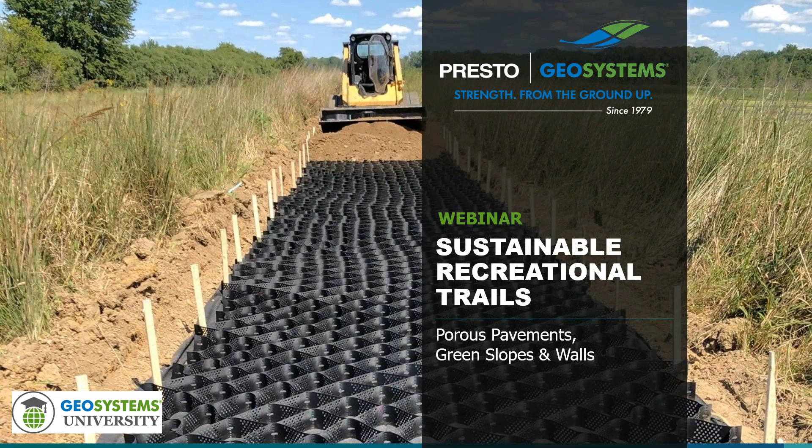The focus of this presentation is on ways to build recreational trails for walking, horse riding, and light vehicle use, as well as different methods for stabilizing embankments near trails.

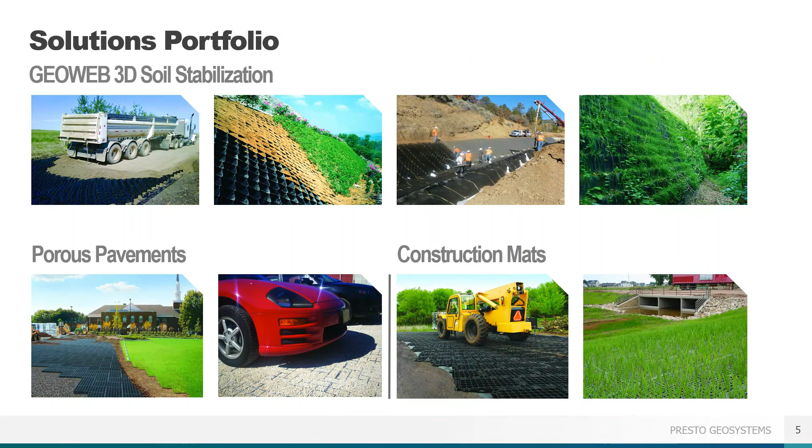Presto operates in 3 product areas: soil stabilization using our GEOWEB Geocells, which can be used for load support, slope and channel protection, and constructing green retaining walls; porous pavements, of which we have both vegetated and aggregate solutions; and lightweight reusable construction mats. Today, we will cover some GEOWEB solutions, as well as our aggregate porous pavement product and a few of our construction mats.

An important thing to keep in mind as we go through this webinar: the trails made with our products are all considered permeable trails. That is, there's no impermeable paved surface being placed. The final surface is going to be a stone or sand material. This lessens the environmental impact of the trail, reduces the amount of heavy equipment required for installation, often in difficult to reach locations, and improves the overall cost and speed of the project.

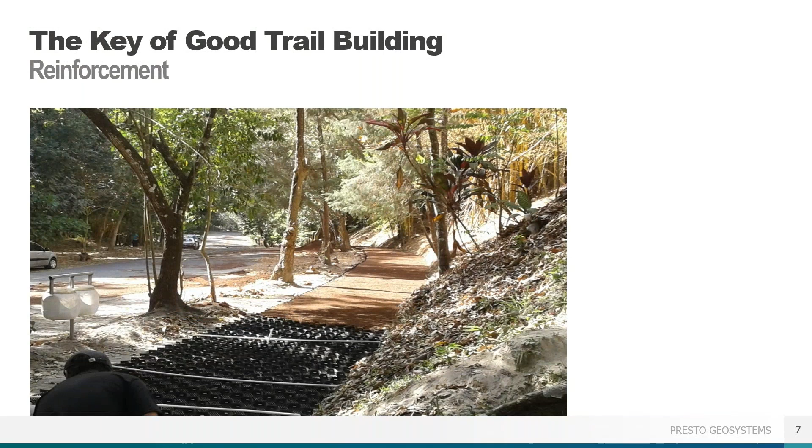We'll begin with what makes a good trail. The first aspect of the design is the reinforcement of the trail area. Especially when the trail moves through sensitive areas, keeping the path intact is how you keep people from damaging vegetation or getting lost while wandering. The trail needs to be clearly delineated and reinforced enough to stay in place over time. Using products specially designed to act as reinforcement of the soil or stone means the trail will last longer and will not encroach on the surrounding environment.

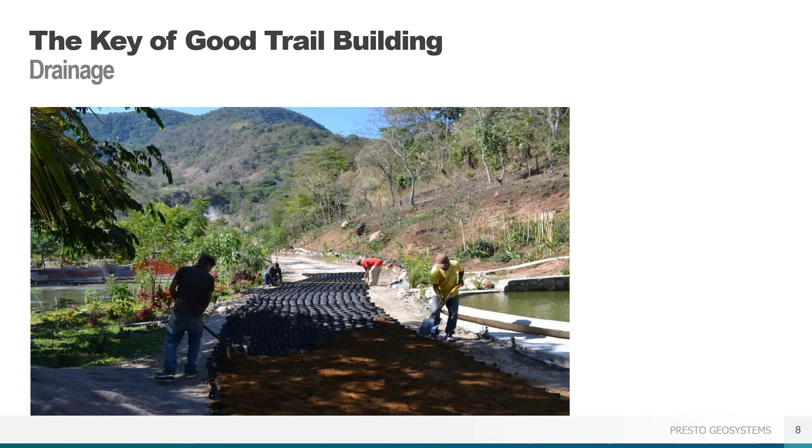The next key to a well-designed trail is drainage. Ponding water can ruin a trail surface, and water that runs off the trail into unreinforced areas can scour and damage those areas. As I mentioned, all the products from Presto are considered permeable, and it is precisely for this reason. By keeping the surface permeable, the water infiltrates at the point of contact right when it hits the trail. The water can then permeate down through the product and into the subgrade, entering the groundwater system. The water won't pond at the surface, and it won't run off or collect outside the reinforced areas. This keeps the trail in the same condition, no matter the weather, so there won't be any flaws or failures created below the surface that you can't see.

The last thing to consider when designing a trail is how to confine the surface. Loose aggregate, stone, or sand is easily moved under shoes, hooves, tires, and water, leading to ruts, holes, and generally damaged trail areas. When the trail surface is damaged, people are going to want to move around the damage, leading them off the trail and into unprotected areas, potentially disturbing sensitive environments.

Keeping the surface in place is an important feature of the products from Presto. When the stone or sand is properly held in place, ruts cannot form and the material can't be washed away. This greatly reduces the amount of maintenance required because the trail surfaces aren't degrading.

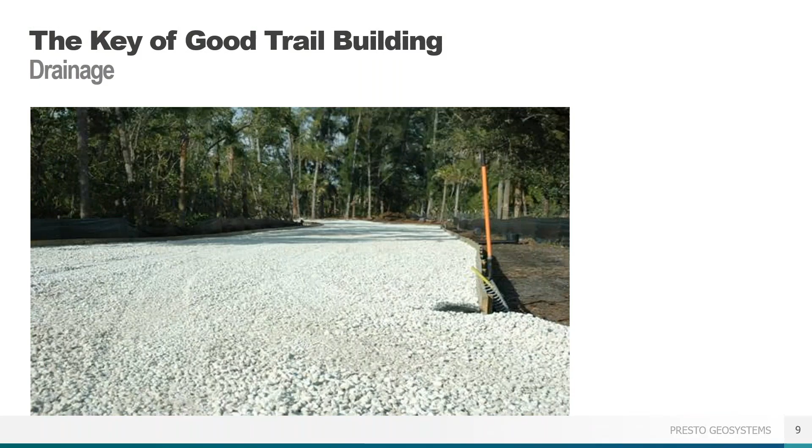The first product we'll look at is the GEOWEB 3-dimensional soil confinement system. This is a geocell, which may be a term you have heard before. It is similar to a geogrid, but is 3-dimensional, so it has depth to provide true confinement and can be used in a wider variety of applications.

The GEOWEB system consists of two main components, cell size and cell depth. The cells come in three sizes, roughly 8 inches by 10 inches, 11 inches by 12 inches, and 18 inches by 20 inches, and heights of 3, 4, 6, 8, and 12 inches. The combination of cell size and depth depend on the project details and loading requirements, but generally trails will use a 4 or 6 inch depth and a small or medium-sized cell.

Seam strength is very important to the function of a geocell. The stronger the seam strength, the better designed the geocell is. A strong seam allows for heavier infill material, steeper and taller slopes, and better lifetime performance. The strength of the panel material, in our case high-density polyethylene, is also critical to the strength and performance of a geocell system.

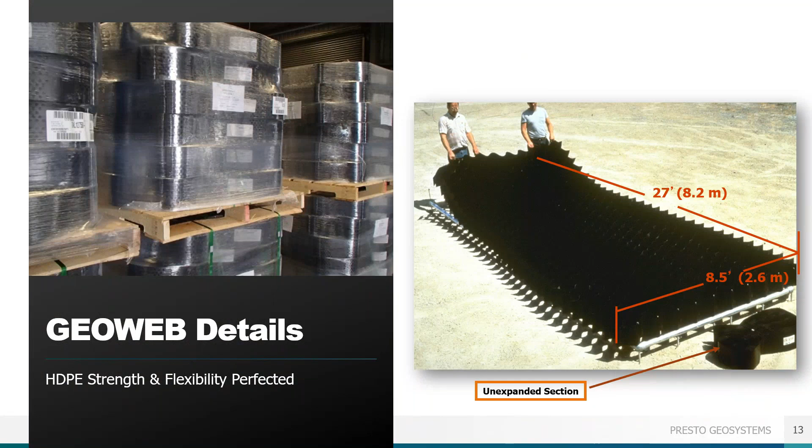Here you can see a typical GEOWEB panel. It comes tri-folded and palletized. Each section has a nominal width of 8.5 feet, with lengths varying between 12 and 58 feet. The panels are flexible, opening like an accordion, so they can follow the natural contours of the work site without being confined to a rigid set of dimensions. The panels can also be easily field cut to fit whatever project dimensions you require.

GEOWEB and our accessories are 100% made in the USA under strict quality assurance and environmental control processes, sure to comply with all requirements for Build America, Buy America and the Infrastructure Investment and Jobs Act.

The GEOWEB system is a 3-dimensional cellular confinement system, meaning that the GEOWEB panels have individual cells that are filled with an infill material that ultimately makes the final surface of the trail. By confining the infill material, the system distributes the loads and prevents rutting, and the cells keep the infill in place so that it doesn't wash away from stormwater runoff or move with traffic.

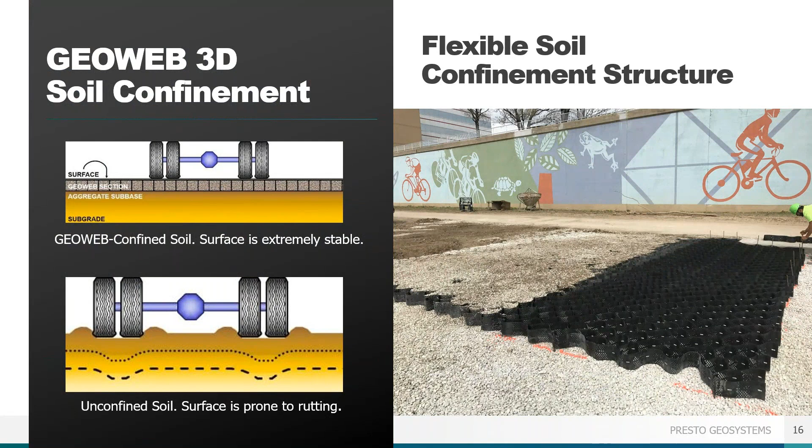The surface of the trail is going to be stable no matter what infill is chosen and require very minimal maintenance for the lifetime of the project. Let's look at some different options for building stable trails with the GEOWEB system.

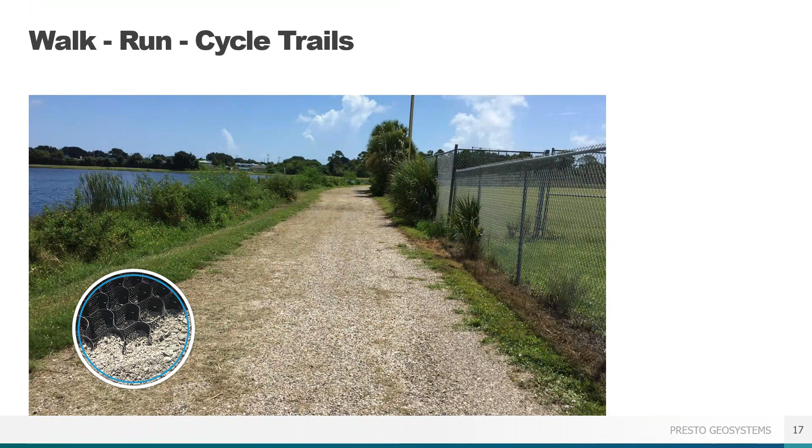Walk, run, cycle trails are meant for people, small animals such as dogs, and bicycles only. This type of trail is typically not meant for equestrian use. These are the most common types of trails and can go along shorelines, through urban areas, or through forests or parks. The flexibility of the GEOWEB panels allows for smooth, natural-looking curves.

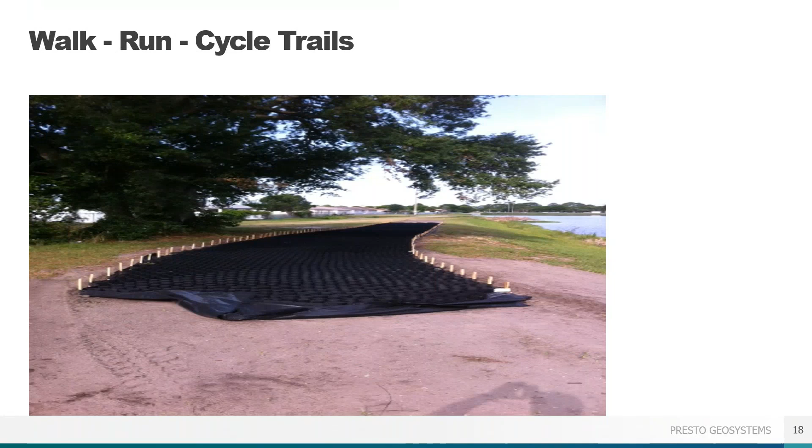The only limitations being it should be angular and have a maximum particle size of about 1/3 the cell depth. So you can use what is local to your area without needing to truck in expensive engineered aggregates.

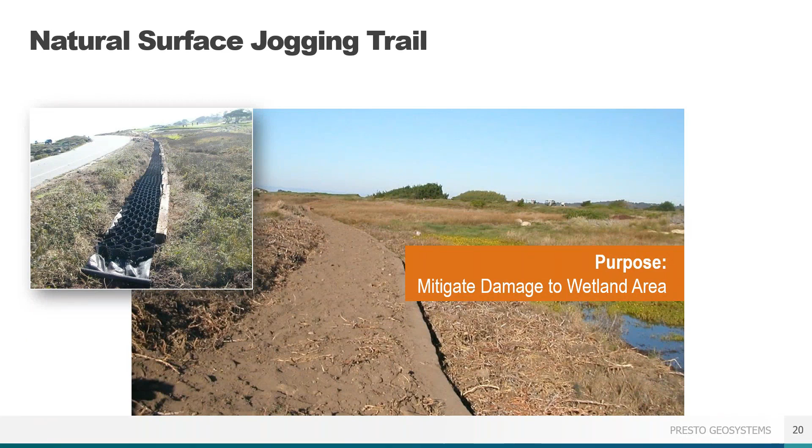As I said, it is easy to field cut the GEOWEB panels to accommodate the trail dimensions, even rather narrow trails like this one between a road and protected wetlands. By having the GEOWEB panels create the trail, water runoff from the road won't wash dirt into the wetlands because the water will be able to infiltrate through the permeable GEOWEB surface, keeping the dirt surface in place for a nice jogging path.

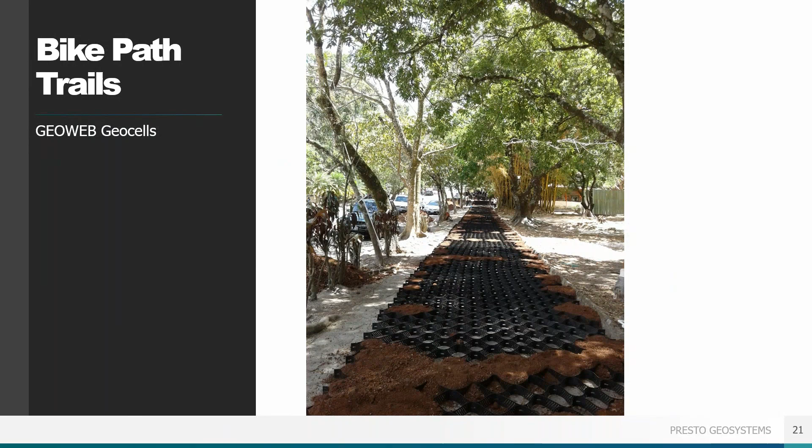Paths through neighborhoods or urban areas can augment or replace traditional sidewalks in places where drainage is a concern. Replacing broken and ugly concrete sidewalks with gravel surface paths allows for flexibility in design and aesthetic, and will improve the safety of the walkway for pedestrians. These types of trails are good for any typical sidewalk traffic, but can also be designed to support cars or trucks.

A 3 or 4 man crew can install about 1,500 square feet of GEOWEB panels per hour, including laying a geotextile fabric and infilling the panels. The geotextile helps create a separation layer between the natural subgrade and the infill material, especially important in areas of very soft subgrade such as wet clay.

The flexible nature of the GEOWEB panels allows it to conform to hills and dips in the paths, and allows the system to be pitched to one side if needed. Because GEOWEB gives additional strength to the infill material through confinement, cross sections can be cut in half or more, reducing excavation, aggregate, and maintenance costs.

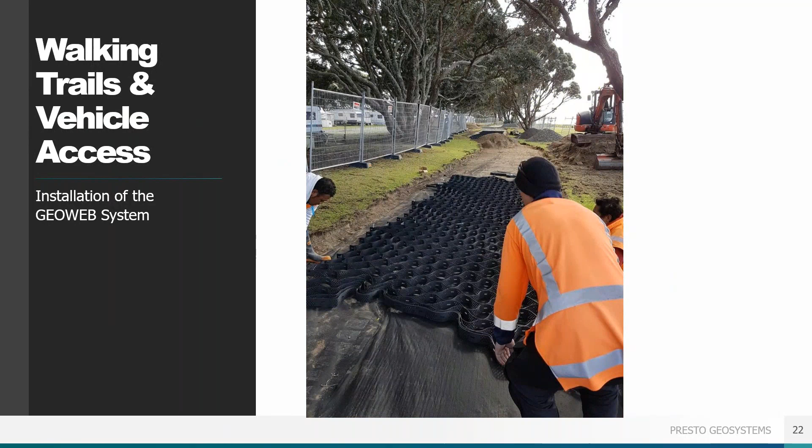We recommend overfilling the GEOWEB panels slightly when installing so that there is a wear surface over the panels and the plastic is not visible. This surface will become naturally compacted over time based on the trail usage. Having the panels slightly overfilled helps protect the GEOWEB material from vehicle tires or other potential damage.

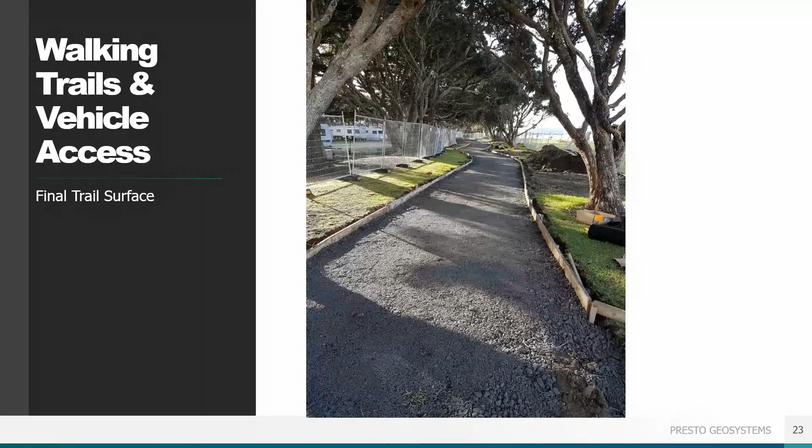Equestrian trails are next, and they have some different requirements than walking paths. Equestrian trails have to be hardy enough to stand up to horseshoes while remaining smooth enough to avoid damaging their hooves. Horseshoes can pick up a surprising amount of dirt with each step, and with their heavy concentrated point loading can cause quick deterioration of the trail.

If the trail is designed to withstand horse traffic, it is more than sufficient to handle hiking, biking, and small motorized vehicles.

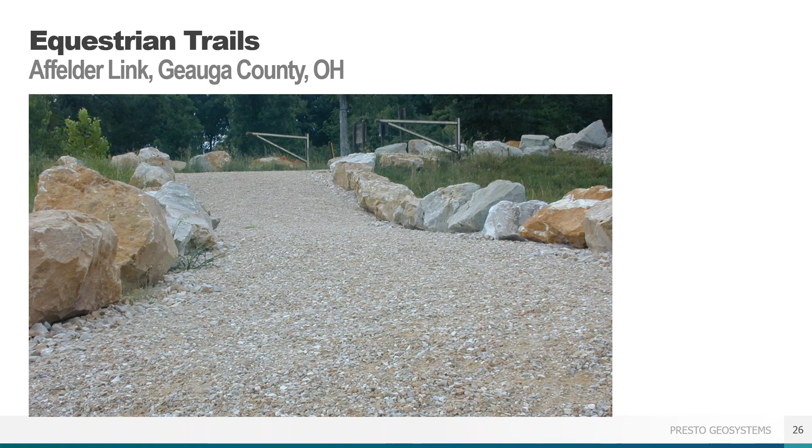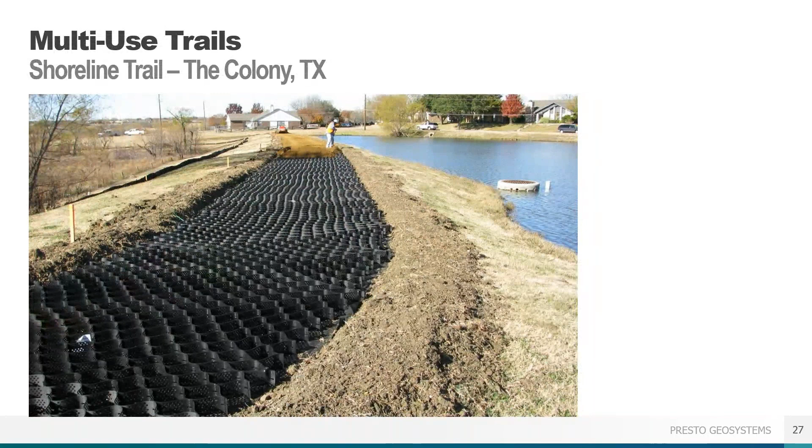Now we're going to walk through a case study for a shoreline trail in the Colony, Texas. This project was a multi-use trail along the shoreline of a lake. The trail will see pedestrians, bikes, small vehicles, and potentially equestrian traffic.

The client, the city of the Colony, wanted to follow the natural contours of the shoreline, which the flexible GEOWEB panels could easily handle.

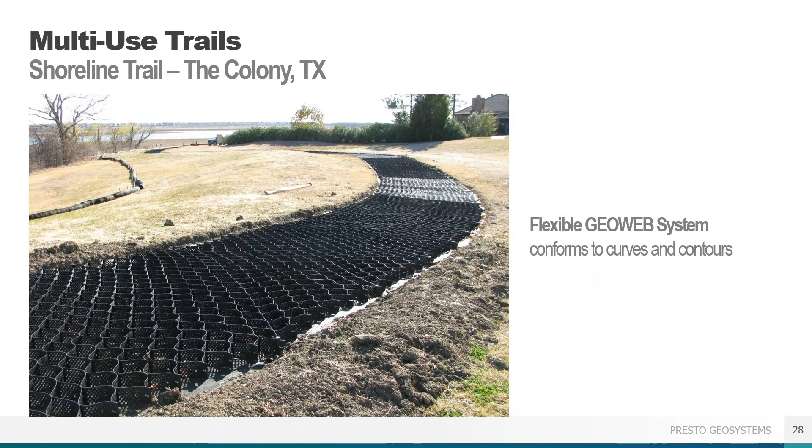There was a concern about the potential for uplift under the system due to the very high water table and lake level fluctuations, so additional steps were taken to prevent this from occurring. A series of polyester tendons were run through the GEOWEB panels and were anchored multiple times per panel. The tendons, in conjunction with the final infill stone material, prevent the GEOWEB system from lifting and deforming due to groundwater pressures. This is a good practice in wet environments with potentially saturated soils.

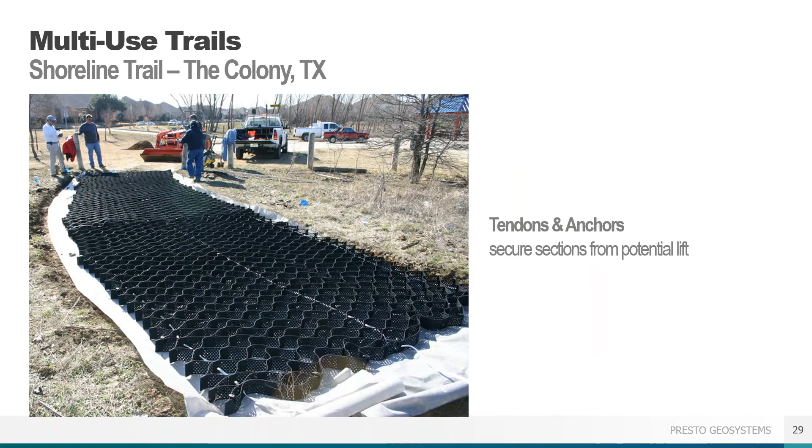A well-graded decomposed granite was chosen as the infill material as it was readily available in the area. Using local materials is encouraged, though any type of stone is acceptable, again, as long as it is angular and allows good drainage. This means that you're going to want stone with limited fines so that water can percolate through.

If the water can't infiltrate, you will get ponding at the surface, similar to a paved surface such as asphalt, so you want to make sure your infill material avoids this problem. And you should keep in mind that this material is going to be your final surface, so aesthetics may be a factor in choosing the infill.

Once the GEOWEB panels were installed, the infill was placed with a standard front end loader and then raked by hand to ensure all the cells were completely filled. The material should be placed on the outside of the panels as needed to match the final grade and meet up with the unexcavated areas.

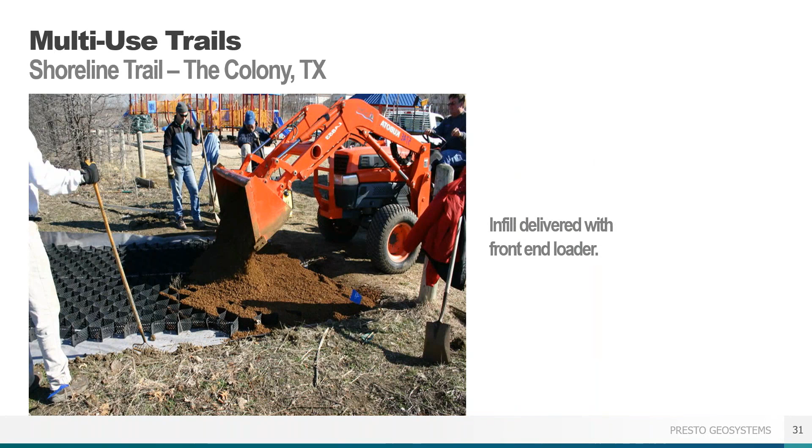For ease of construction, you can drive your vehicles and equipment on the GEOWEB panels as soon as they are filled, right up to the limits of the filled area if necessary, so you don't have to wait for the entire system to be filled before using it. This can help minimize the impact of construction on the area, since you won't need to create access lanes or clear out excess vegetation on the sides.

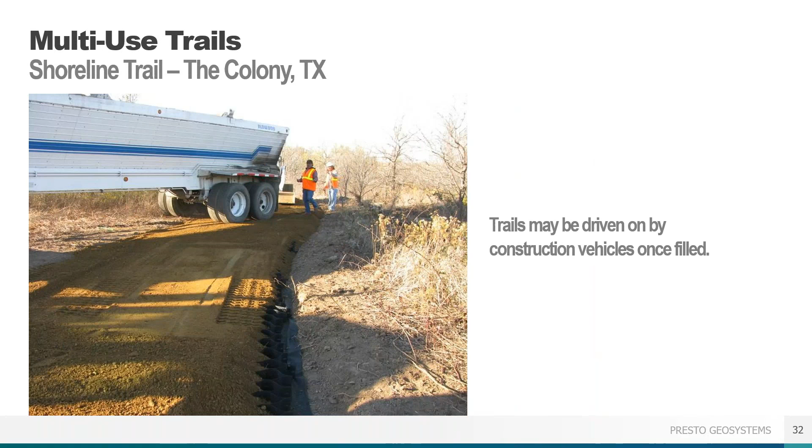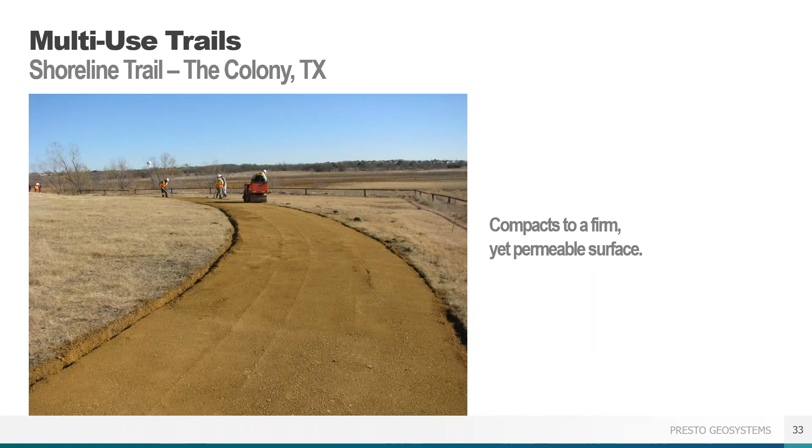A small smooth-barreled roller compactor finishes off the job. This is where having the wearing surface of overfilled material mentioned earlier comes into play. The compactor isn't driving directly on the GEOWEB panels, and you can easily visually confirm that no cell is underfilled.

Again, the stone infill should have minimal fines, less than 10% is ideal. Avoiding fines in your stone allows the system to stay permeable and not get clogged.

Trails built with the GEOWEB system are a great example of green infrastructure by not disrupting the water cycle or impacting the groundwater flow. No additional stormwater infrastructure is needed when the trail surface is permeable, so there is minimal impact on the environment around the trail.

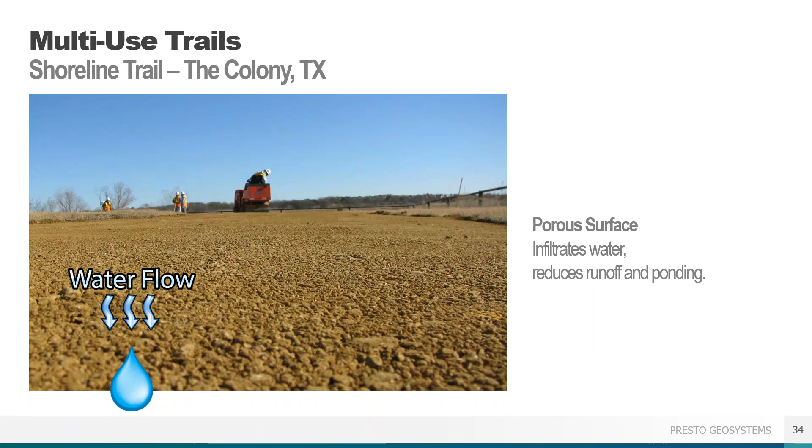Here we can see the nice clean trail created using GEOWEB, allowing for most uses without having to worry about needing constant maintenance. The path is clearly delineated while maintaining a natural look that people won't mind seeing in their backyards.

A few months after installation, there was a massive rainfall event, over 7 inches in a 3-hour period, which can be incredibly damaging both during and after the storm.

Several portions of the trail were flooded to the point of standing water at the surface on and around the GEOWEB protected areas.

But thanks to the GEOWEB system and the extra precautions such as the tendon anchorage, the trail was not washed away as you might expect from an unprotected gravel trail.

The trail was still usable, allowing maintenance workers access to the damaged areas for inspection and repair. No repair was needed to the GEOWEB system, and once the water was able to infiltrate, the trail was as good as new.

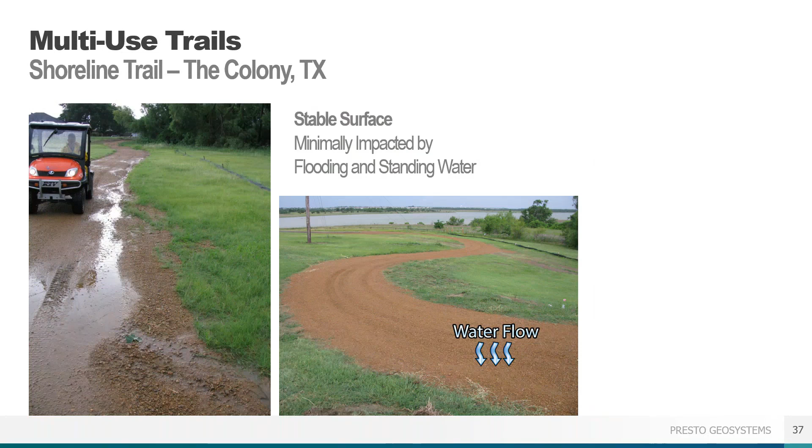When there is such a large rainfall event, the ground becomes saturated and doesn't allow water to infiltrate, giving it no choice but to stay at the surface and become sheet runoff.

The GEOWEB system protects the trail surface against erosion when this happens, with the cell walls functioning as a series of check dams, keeping the infill confined within the individual cells. Then, when it is able, the water can infiltrate into the ground and the trail is still in good shape.

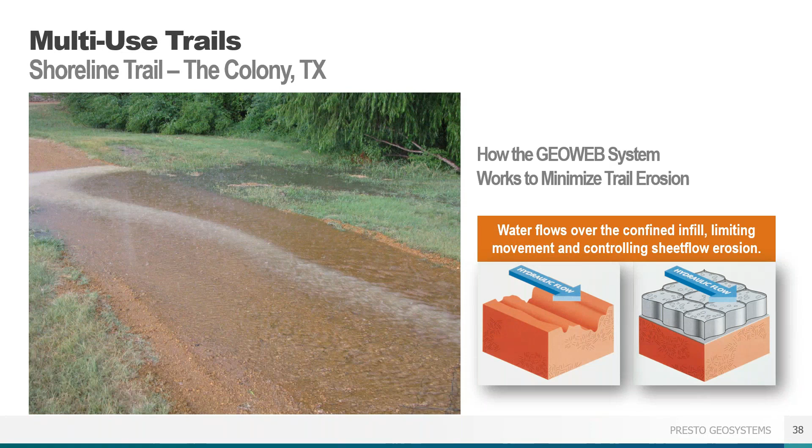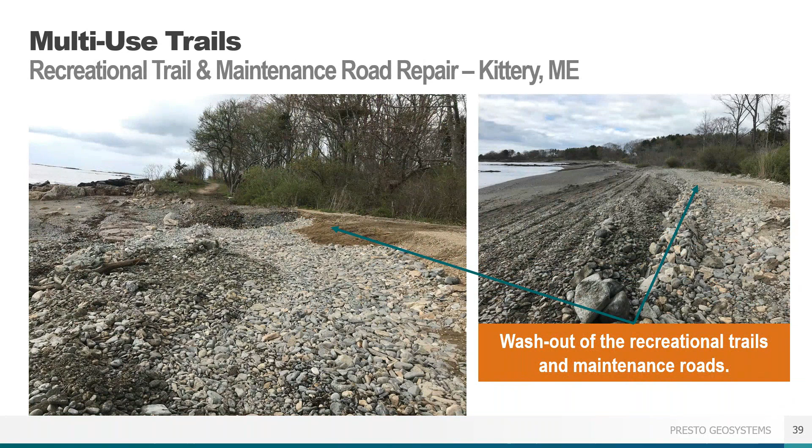In the spring of 2018, several storms violently swept through areas along southern Maine's coastline, devastating the beaches and trails of Fort Foster, a town-owned park in Maine. As you can see from these photos, the trails and maintenance roads were washed out.

To reconstruct the washed out recreational trail and maintenance road, 6-inch deep GEOWEB panels were installed at the site and infilled with a 1-inch crushed aggregate.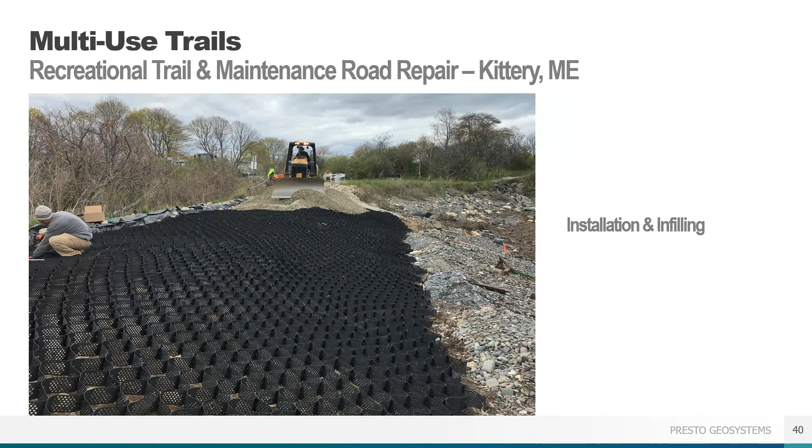There were sections of the trails that sloped down to the beach areas. To stabilize the 2-to-1 sloped areas down to the beaches, 4-inch depth GEOWEB sections were secured to the face of the slope, with dead man tendons and ATRA tendon clips.

Then the GEOWEB was filled with aggregate and covered with large riprap. By using the GEOWEB system, the park was able to armor the maintenance road, recreational trail, and slopes from future storm events. Here's a before and after photo of one of the trails.

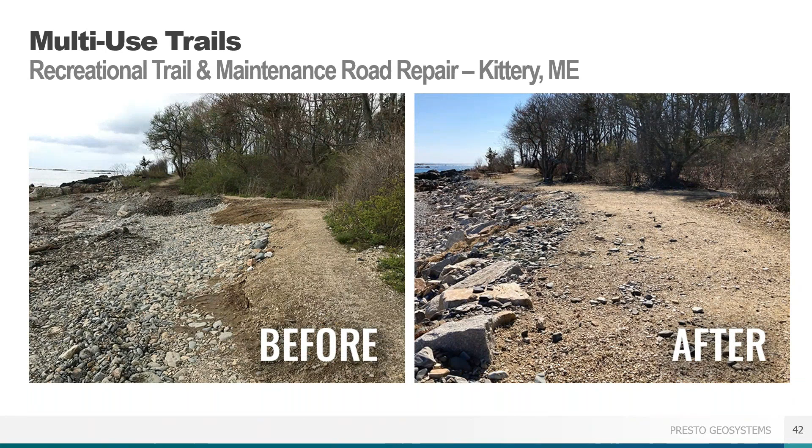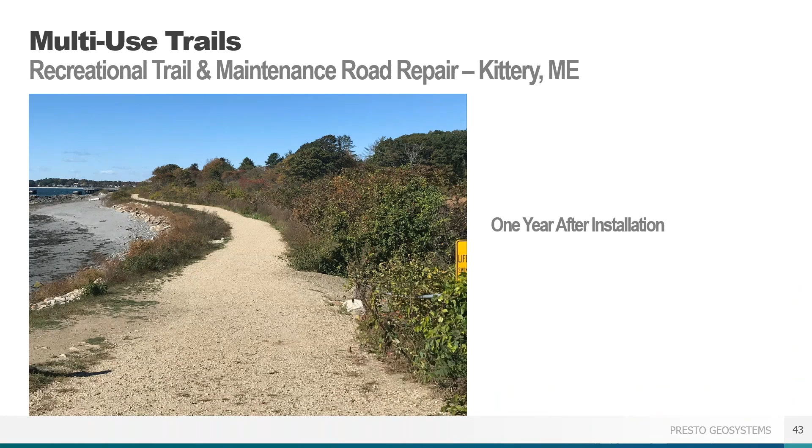Since its original installation in 2018, the GEOWEB load support and shoreline protection system continues to perform as designed, allowing the community to once again enjoy the trail system and local beaches.

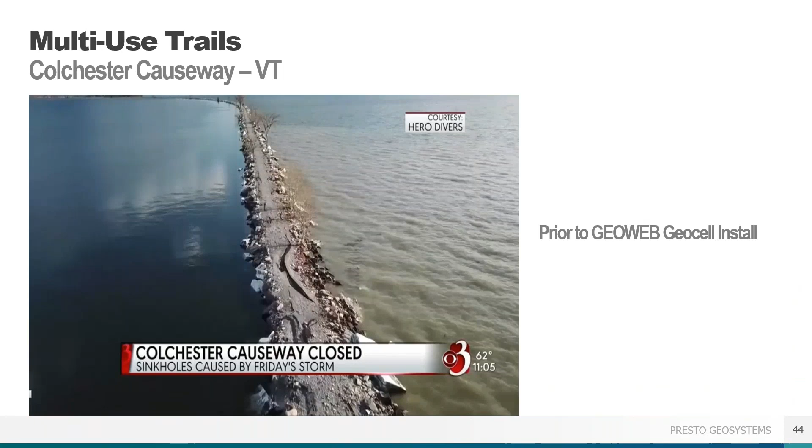The existing causeway on this project, which was used as a walking and biking trail across Lake Champlain, was blown out due to storms and had to be closed.

The local distributor worked with the town and submitted a request for project evaluation through our website. Here you can see Presto's recommendation of the mid-size cell, 4 inches deep.

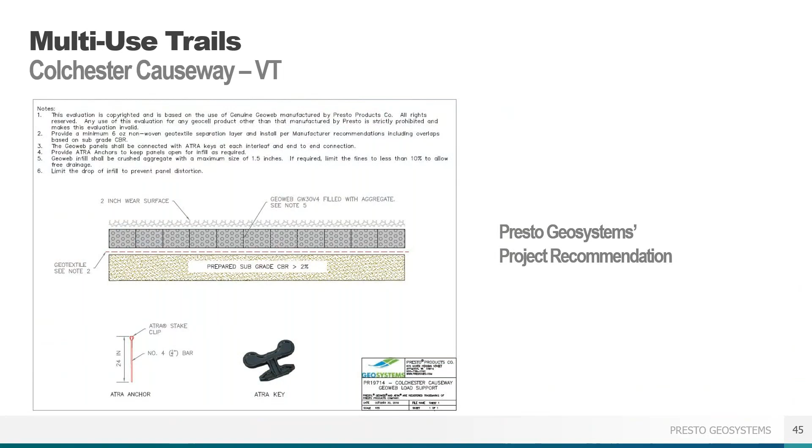Installation took place in November of 2019, and the trail is holding up well after several significant storm events.

One of the biggest questions we get is about cost, especially if this is a new technology for you or your area. Having an idea of how much the GEOWEB system costs compared to other stabilization techniques is very important.

Now, moving away from the GEOWEB system, this next option illustrates similar confinement of infill, but within a rigid paver structure, our GeoPave. Unlike the GEOWEB material, which is typically 3 or 4 inches deep for trails, GeoPave units are 2 inches deep and made from recycled high-density polyethylene.

The GeoPave units have rigid paver characteristics with specific features needed for performance with aggregate infill. The main one I want to highlight is the monolithic mesh bottom, a molded in-place mesh on the underside of the paver unit. This mesh keeps the stone infill from migrating under the unit, and the integrated nature assists in the overall rigidity of the paver unit. The lattice bottom spreads the load similar to a snowshoe so that wheel loads do not create ruts. GeoPave units are locked together with a connection device to create a fully integrated contiguous pavement that is highly resistant to traffic stresses.

GeoPave was designed using finite element analysis and will not lift up over time as seen with other systems. As mentioned, the GeoPave unit is only 2 inches deep, which can be a real asset if the project requires a thin cross section due to buried utilities or high excavation costs.

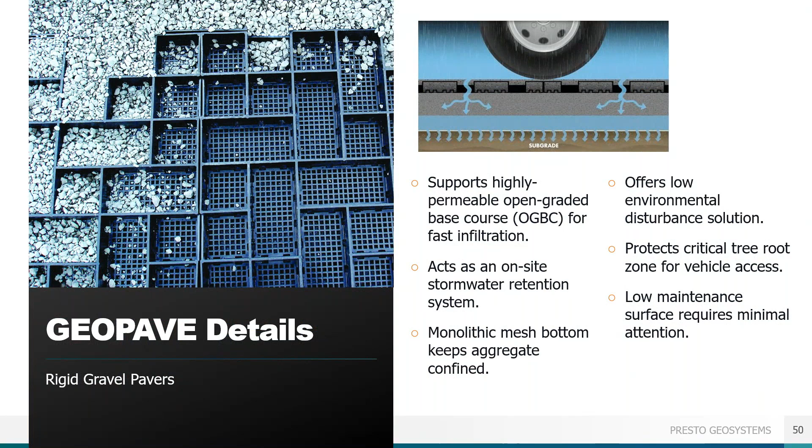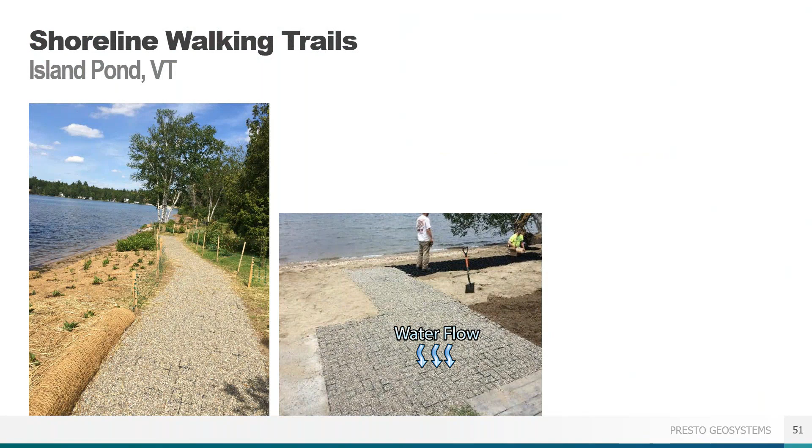We'll now look at a few GeoPave project examples. This project is an access trail for walking down to a swimming area on a lake. The walkway had to be ADA compliant so that everyone could use it. It was also important that the trail help reduce runoff into the lake, so the permeable nature of the GeoPave system was critical.

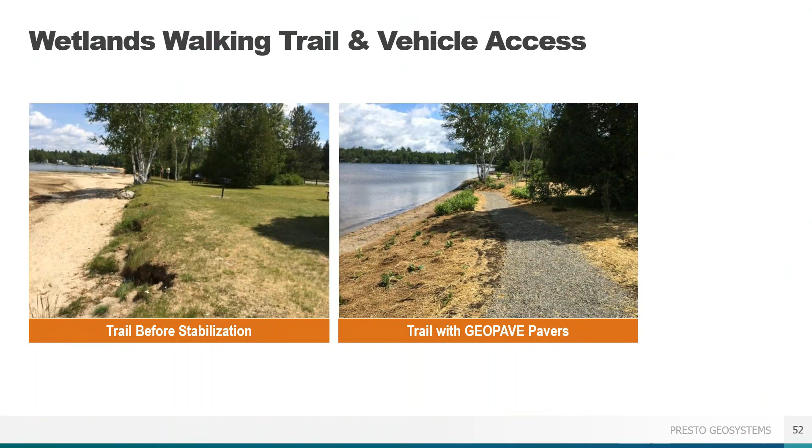This is another trail in a wetland area. Here, the GeoPave units were placed directly on the subgrade, but a geotextile separation fabric and a base layer of aggregate underneath the panels can be incorporated to support heavier loads or add additional detention. No matter the section, the entire system creates a flat, stable surface and supports anticipated loads.

The same principles that we discussed with the GEOWEB system apply here as well. By using an open graded aggregate stone with minimal fine content, the water can infiltrate at the point of contact, reducing surface runoff, and the individual cells confine the aggregate, preventing rutting and washout of the stone for a stable walking surface.

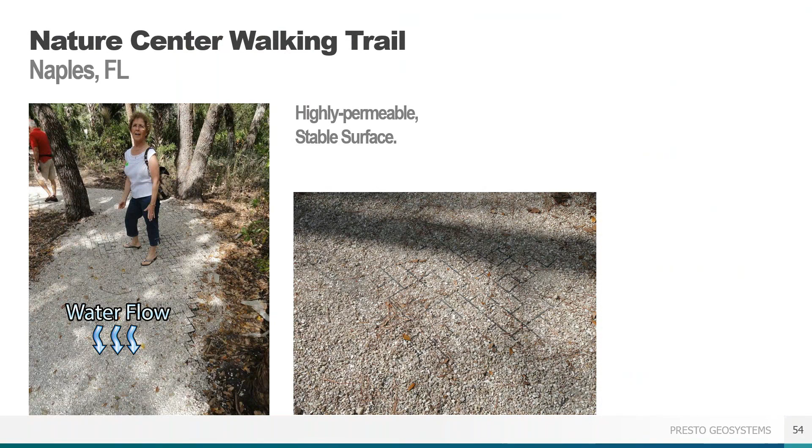A major concern here was protecting sensitive tree roots from impact damage. The GeoPave units are a great way to provide tree root protection by creating a bridge over the roots, so there is no direct contact from vehicle or pedestrian loads that could harm the trees. This bridge lasts the lifetime of the GeoPave trail and allows the trees to grow unimpeded.

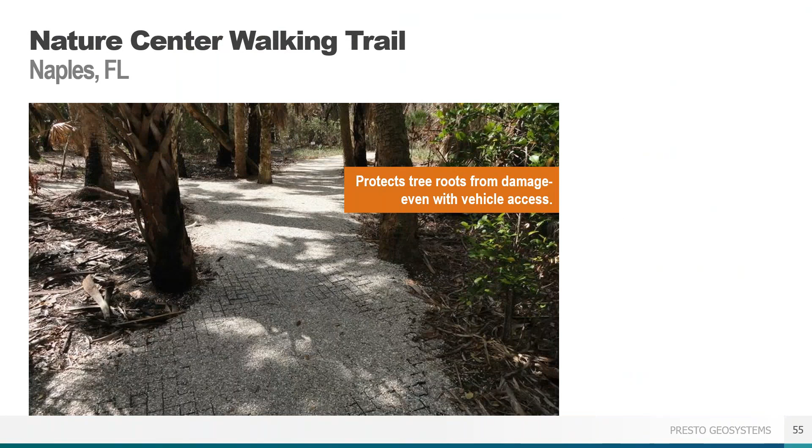One of the great things about building trails with the GeoWeb or GeoPave system is the amount of choice you have over the final look of the system. Two rock colors were chosen at this site to delineate the parking from the walkways. A light colored crushed limestone was used for the parking areas, and a contrasting reddish brown buckshot crushed aggregate for the walkways. Additional delineation, such as concrete parking stops or snap delineators, can be included to help create a sense of separation within the overall GeoPave system.

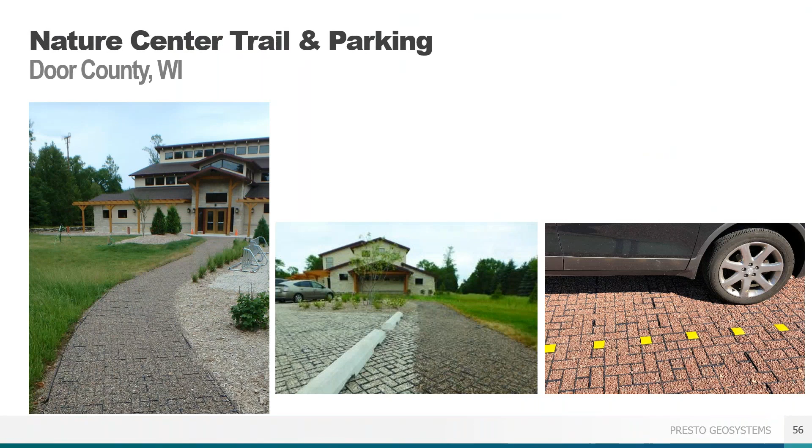The project ultimately earned LEED Gold for all of the low impact structure and landscape elements. Protecting the local watershed was the primary reason for the inclusion of permeable parking and walkways utilizing the GeoPave system. These pavements also perform as natural on-site stormwater detention, storing water in the base for natural percolation without the need for a large isolated detention pond, which would have been an unattractive nuisance on site.

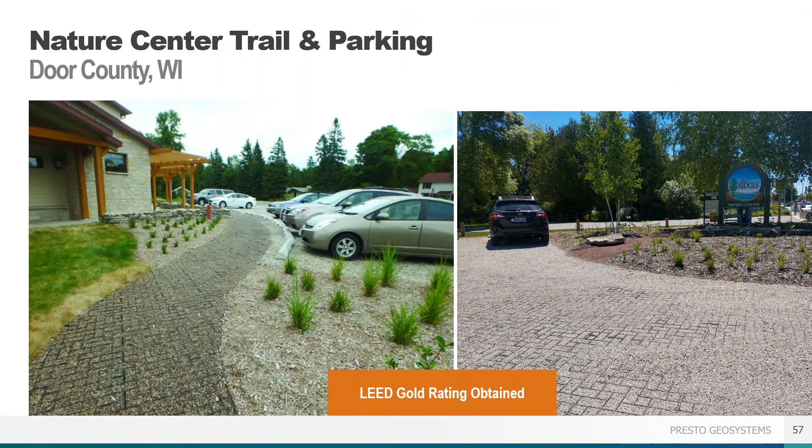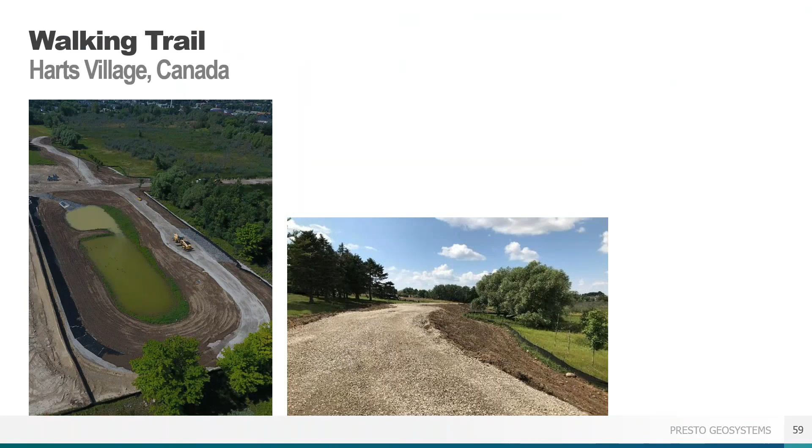The GeoPave units come in 20-inch by 40-inch panels covering about 5.4 square feet, but they can easily be field cut or staggered to accommodate curves, so you're not locked into a linear path. The system was a great choice for this project with a quick and easy installation, the ability to allow water to flow through the system and not run off into the pond, and providing a smooth, clean surface for walking.

The standard GeoPave units are black, but a tan GeoPave is an option that allows natural blending with light colored stone. Again, the options available for the final design of the trails are what make using this system so versatile and a great choice for any project.

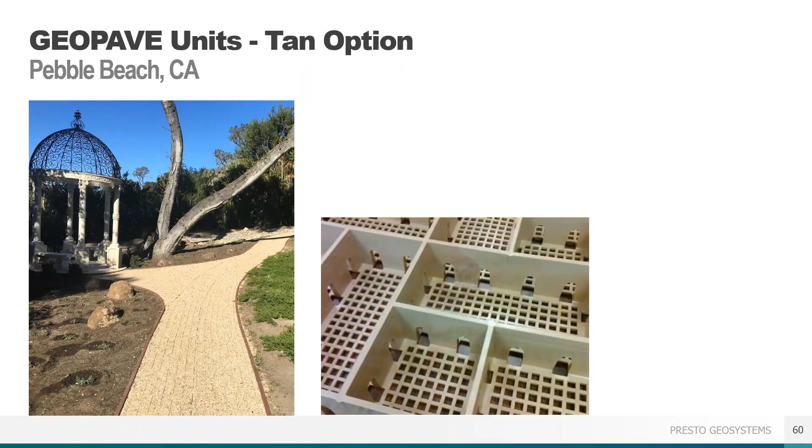The last option for trail surfaces is the GeoTerra system, which are construction mats that are strong yet lightweight and don't require any fill. Because no fill is required, they are perfect for areas where infill resources are scarce.

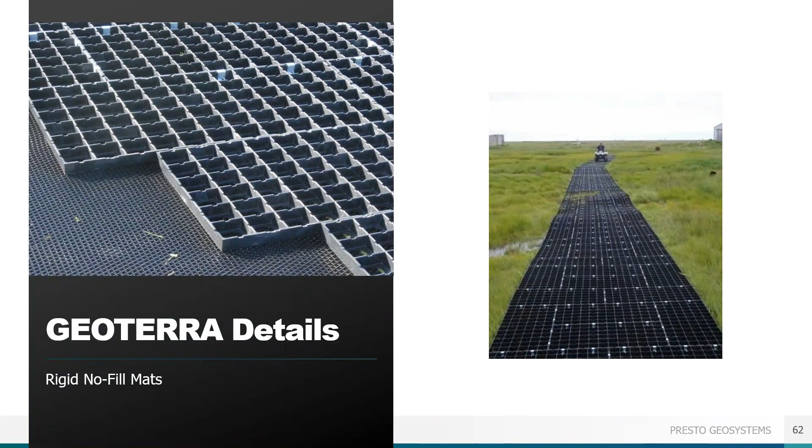Because there's no fill material, GeoTerra trails won't kill the existing vegetation they are placed over. They are open on the top and bottom and allow for vegetation to grow through them for as long as they are in place, which is essential for minimizing environmental impacts for pathways.

GeoTerra units cover approximately 5 square feet each and can be connected to cover a larger area as needed. The mats are strong enough to support heavy vehicle and construction traffic loads and have enough flexural strength to bridge soft soils without warping or cracking.

GeoTerra units are connected with strong metal connectors to essentially form a floating road through wetlands with very soft soils. The connected mat system distributes loading across the pavement, minimizing potential for rutting or sinking in soft, muddy soils.

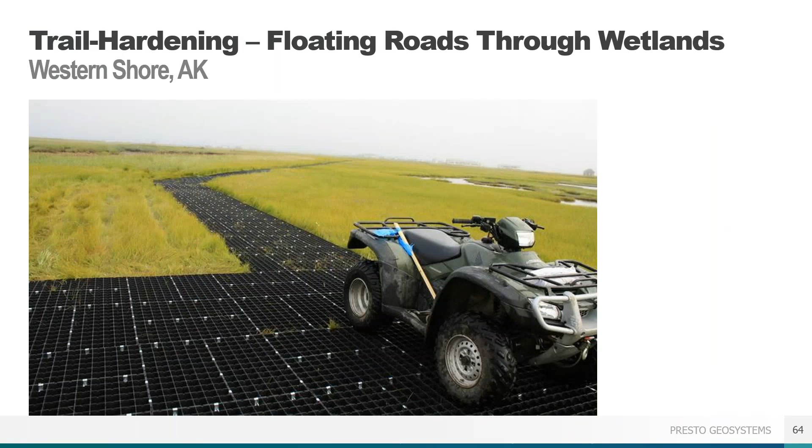In some areas of Alaska, hundreds of miles of ATV trails cut across wetlands and stream beds, causing extensive damage to natural preserves. ATV riders can cause the loss of vegetative cover and habitat values. GeoTerra mats offer a great solution for low impact access in these wet and environmentally sensitive areas.

The preferred method is to place the units across the entire trail width, but in some cases, just in the wheel paths is acceptable.

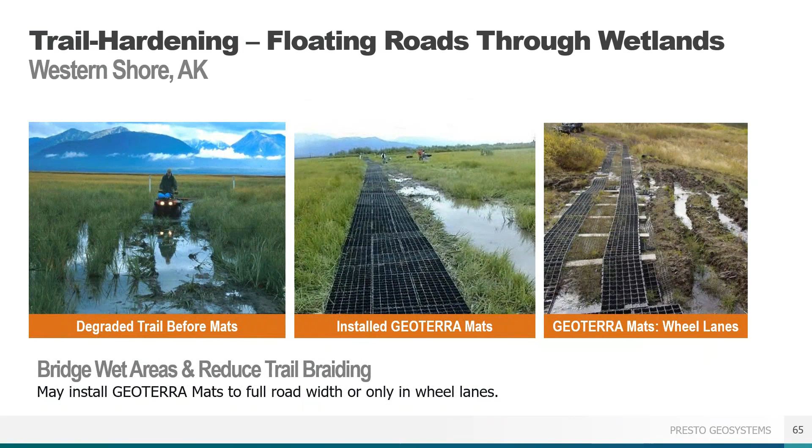As planned, indigenous grasses regenerated through the permeable open-celled GeoTerra mats, ultimately semi-camouflaging the product with the natural environment and protecting the vegetation from damage. In this case, the system ultimately ended up as a permanent structure, and the GeoTerra mats will be able to last for as long as needed.

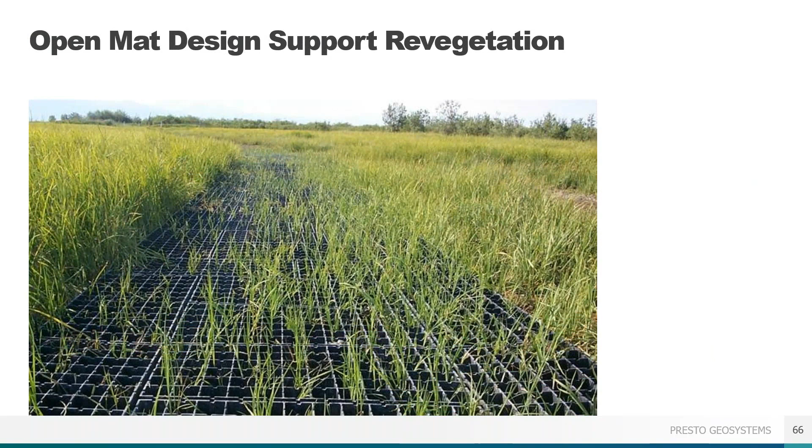The last section is going to pivot from the flat surface of the trail to the embankments that may be alongside or near the trail. Green walls can help create the space for trails to run through and work with permeable trails to allow water flow and promote vegetation.

The same GeoWEB Geocell technology that creates the trail surface can also be adapted to create retaining walls, such as this vegetated levee. The GeoWEB panels are stacked vertically on top of one another to create the wall, allowing for more horizontal space for the trail to be placed.

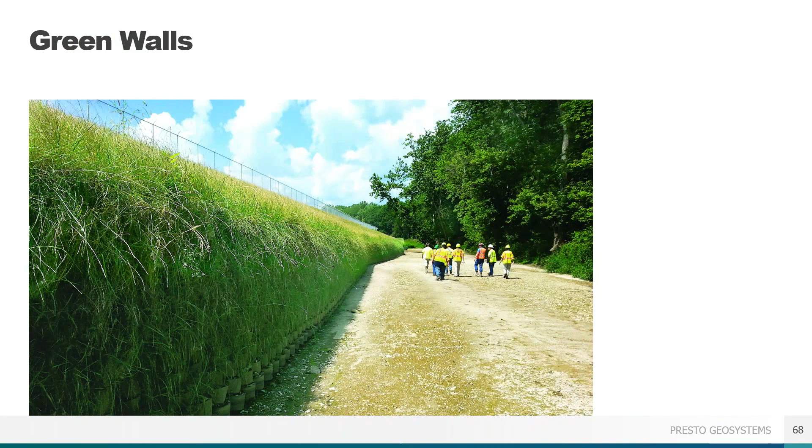The primary benefit of the GeoWEB wall is to create a stable, natural living structure with vegetation for aesthetic appeal. The open front fascia allows rainwater to infiltrate, and the wall structure can also absorb some runoff from the top of the wall, such as from walking trails.

While vegetated walls are most common, aggregate-filled walls are also possible. Using the same open graded aggregate we have been talking about, water can infiltrate through the wall so there isn't runoff onto your road or trail. An aggregate wall may be useful when you don't want to worry about maintaining vegetation in an area, such as an emergency response space or in areas where vegetation is difficult to establish.

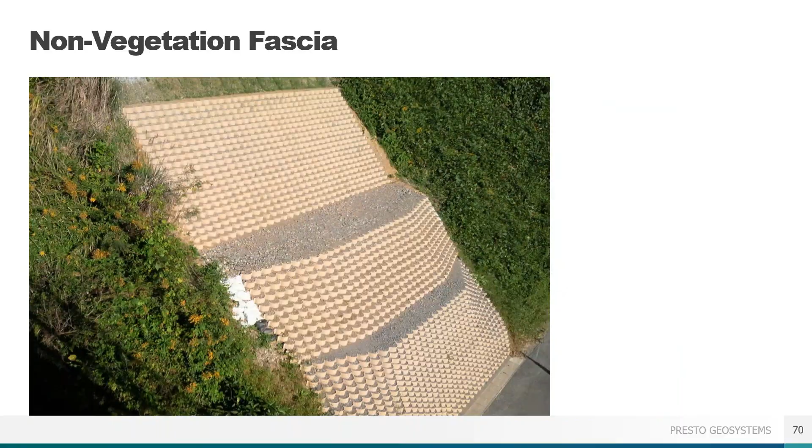The walls are designed as either gravity or reinforced walls in the same way as mechanically stabilized earth, or MSE, wall systems. An advantage they have over MSE block walls is flexibility in poor soil conditions. Their relatively lightweight and flexible nature allows them to tolerate reasonable differential settlement very well.

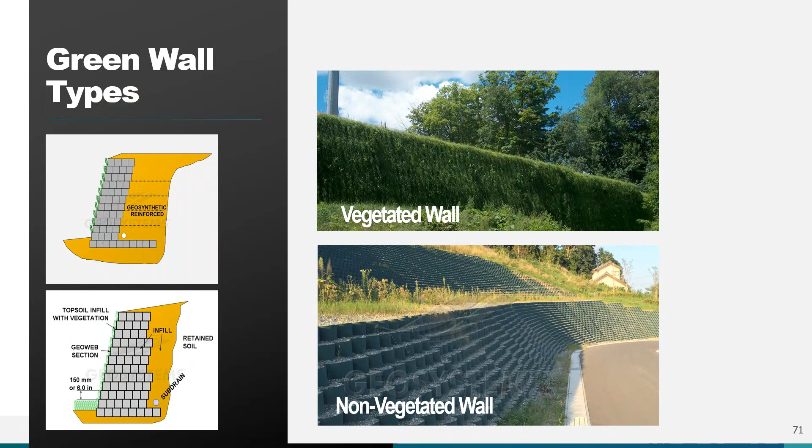Another advantage over traditional walls, such as gabion baskets, is the relatively shallow embedment depth of the wall and the ability to create a very steep wall face up to about 80 degrees.

It is always necessary to consider live and dead loads that the wall will experience, especially when placed near trails or roads. Dead loads can be buildings or soil slopes above the wall. Live loads are from construction traffic and long-term vehicle traffic.

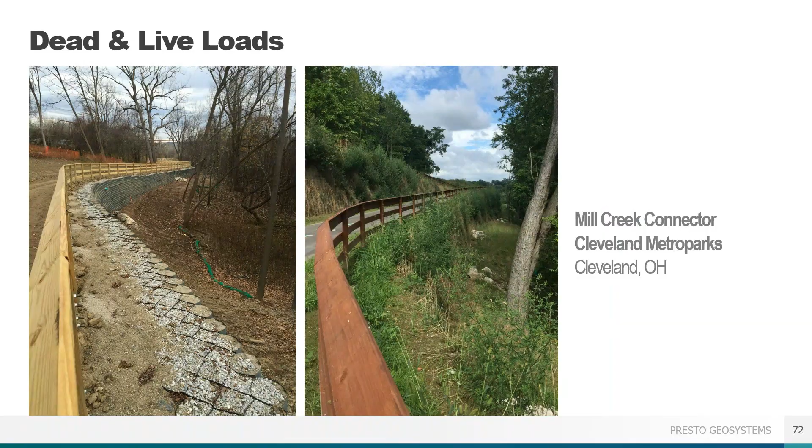We'll now look at a vegetated retaining wall case study.

This project was faced with having to retain soils in a very problematic soft soil area, but piling systems were expensive and they wanted to maintain the natural environment. Concrete and modular block walls were considered, but ultimately they chose the vegetated geocell wall for its natural aesthetics and lower cost.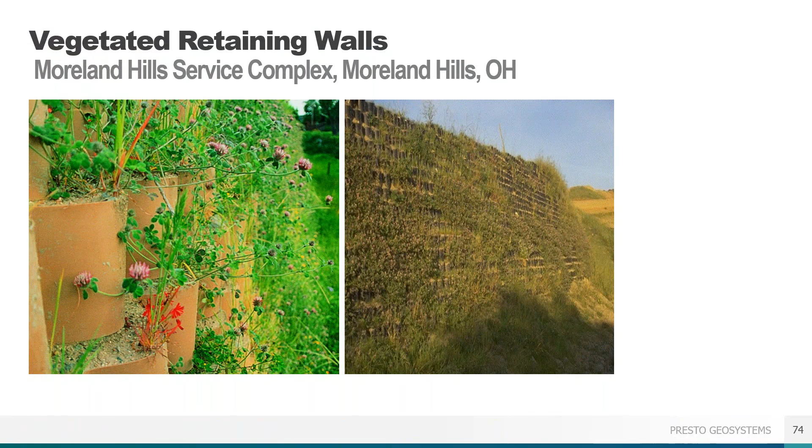Here you can see the wall structure is constructed with a slight setback to allow for topsoil fill and vegetation. The backfill material is a good drainable aggregate. The wall can be seeded either by mixing the seeds in the soil before installation or by hydroseeding or broadcasting once installation is complete.

As mentioned, the system's inherent ability to withstand some differential settlement in soft soil environments was extremely important at this site. The wall had varying heights along its length, which was also easily accommodated by the Geocell system. By using the Geocell wall, they didn't have to bring in invasive equipment such as augers or H-piles, speeding the installation process.

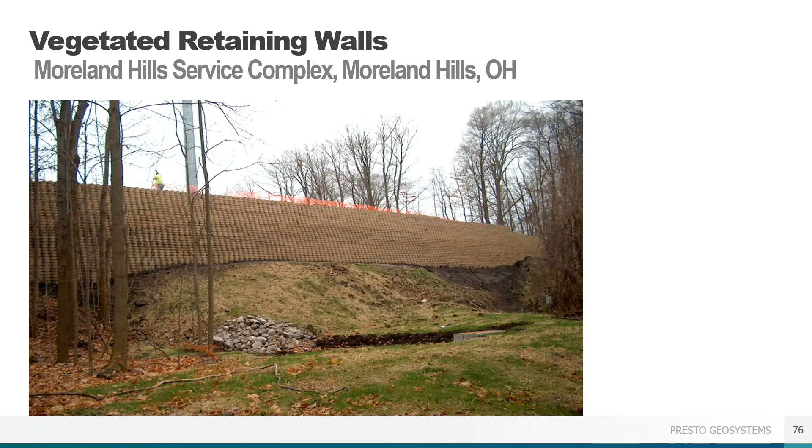Here's the completely vegetated wall. The horizontal terraces allow rainwater collection, helping to minimize runoff and erosion. Pretty much any type of grass or flowering vegetation will survive on these walls, so by using local vegetation, upkeep can be kept to a minimum.

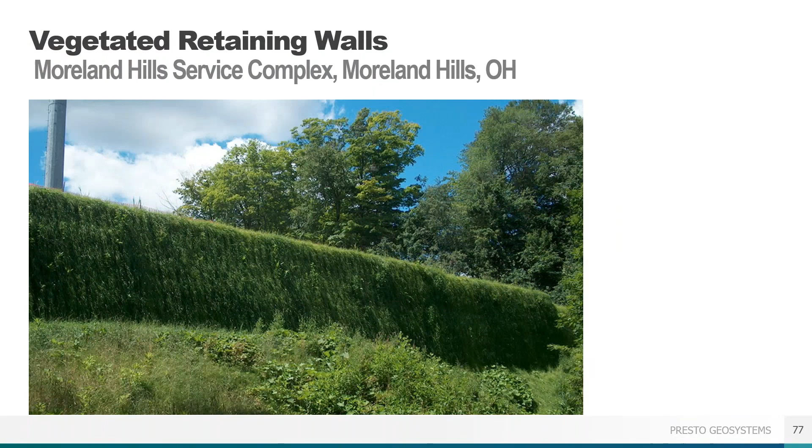Presto Geosystems offers free software for designing GeoWeb retaining walls and slopes. It is available on our website, again prestogeo.com, and can be used by engineers and designers to determine if the GeoWeb system is appropriate for your projects. There are a lot of resources on the website on how to use and interpret the software, but we are always happy to help with questions or recommendations.

So far, we have looked at trail surface construction and vegetated retaining walls. GeoWeb can also be used for erosion protection in a superficial manner. This is a good way to protect slopes against erosion when the slope is shallower than what would be required for a retaining wall and globally stable, around 60 degrees or shallower generally. If there are questions about this type of application, we are happy to talk through it.

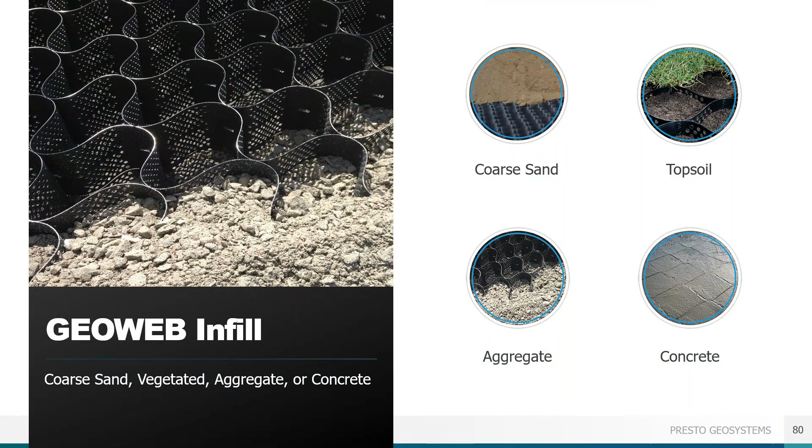There are three main infill types for slopes, depending on the type of protection needed: topsoil, aggregates or granular materials, and concrete. We will focus on topsoil and vegetation infill, as that is typically what is selected in trail applications to keep things looking as natural as possible.

The GeoWeb is then filled with the desired infill, and if vegetated, an erosion control blanket or hydroseeding is used until vegetation is established.

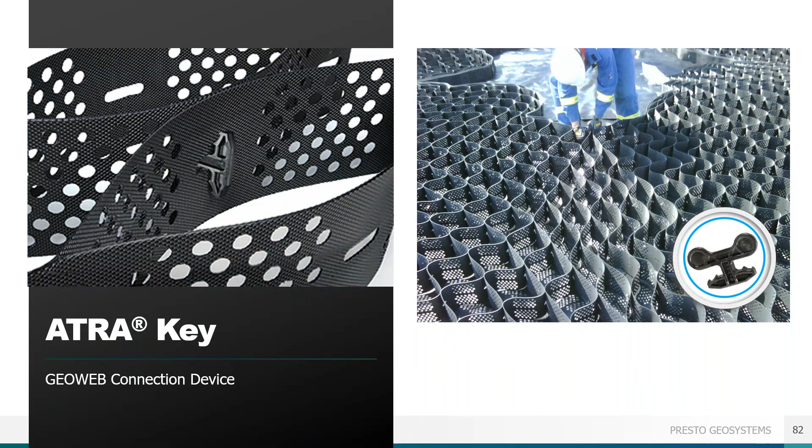As slope angle increases, the driving force of the infill material exceeds the available frictional resisting force, and additional anchorage is required. The ATRA anchors, which are our ATRA stake clips on top of number 4 rebar, hold the GeoWeb to the slope and penetrate into the ground. If corrosion resistance is required due to project conditions, Presto has an HDPE ATRA speed stake that is designed to work with the GeoWeb.

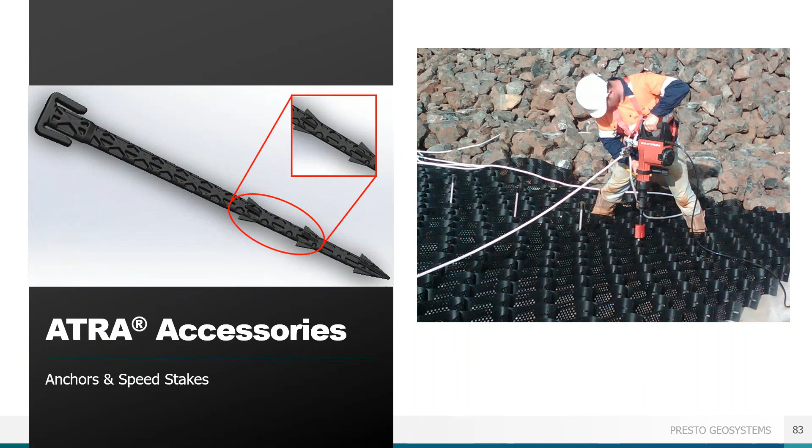For long, steep slopes, slopes where the native soil is highly erodible, or over a surface that cannot be punctured, such as a liner, tendons can be used. The ATRA tendon clips transfer the load from heavy infill material to the tendons and crest anchorage system. Only the ATRA tendon clip is specifically designed to fully transfer safely and securely the forces placed upon the geocell.

Every accessory and every feature has been designed and tested to specifically work together so that we go from problem to design to construction solution with a system where the modeling replicates the real world forces.

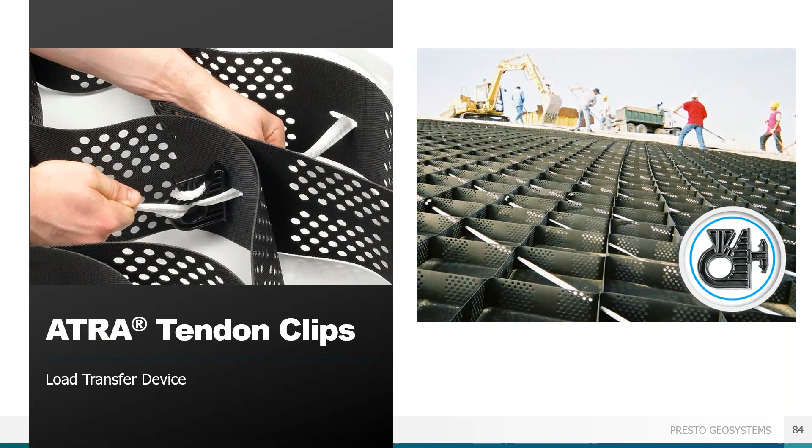Now we'll take a quick look at a couple of slope protection projects associated with trails. The American Tobacco Trail is a 20-mile rails to trails project running from Durham County to Chatham County in North Carolina. This slope had to be reconstructed after it was excavated in conjunction with the replacement of a culvert. After the culvert was replaced, the slope was regraded to its original 1.3 to 1 slope, and it needed to be revegetated. The GEOWEB slope protection system proved to be the perfect solution.

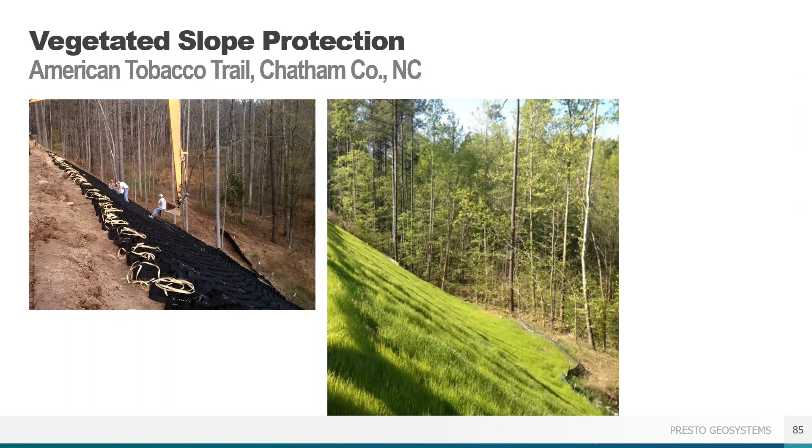In summary, Presto Geosystems offers GeoWeb, GeoPave, and GeoTerra that can meet any trail design needs, as well as GeoWeb for earth retention and slope protection near trails. Each product is designed to protect the surrounding environment while offering a low-maintenance surface that won't wash away during heavy rain events. We offer a complete solution, including connections and anchoring options.

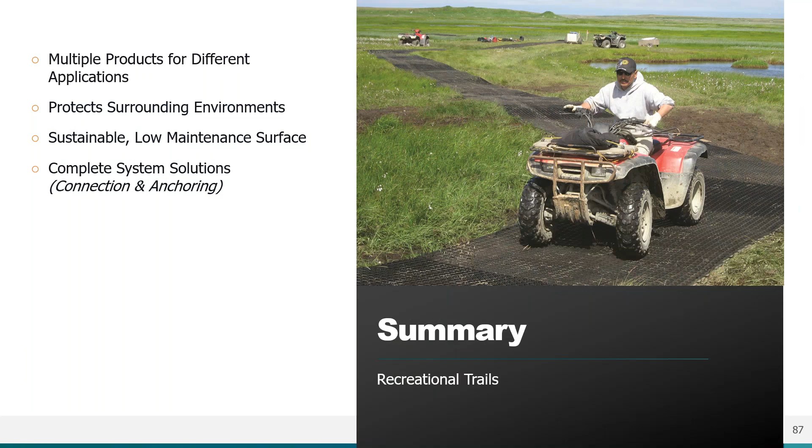Part of our complete solution is our technical assistance. We provide free project design evaluations. The form is on our website. You can fill it out with as much information as you have, including attaching documents such as geotech reports, and it comes to us. Within 3 business days, but usually faster, we provide a complete design evaluation, including infill recommendations and anchorage requirements. We will work with you to get you the best design for your project.

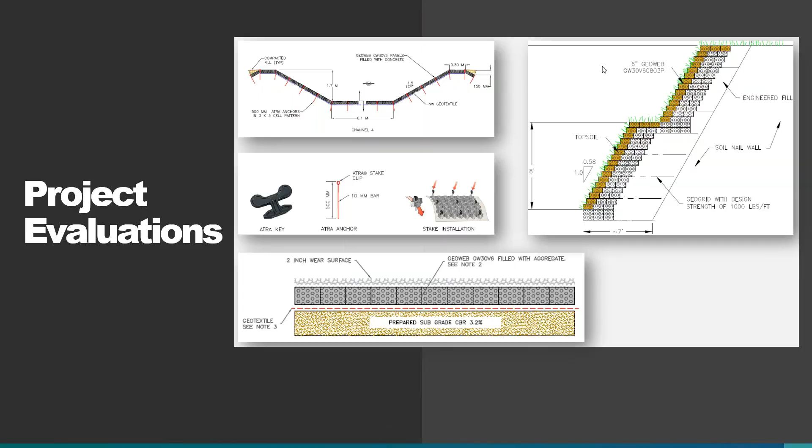We deliver quality and over 40 years of expertise, guaranteeing each shipment meets or exceeds our specs so you can deliver certainty and build with materials you can trust.